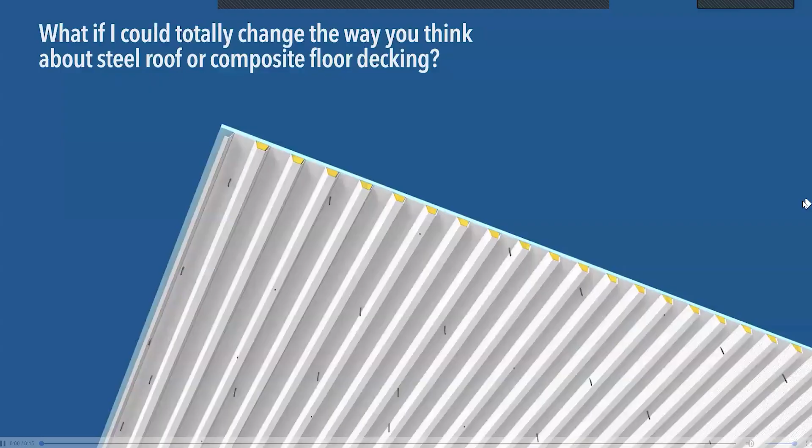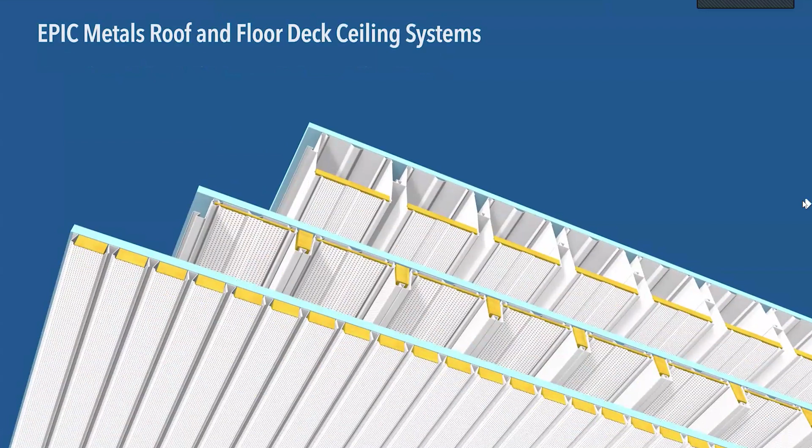What if I could totally change the way you think about steel roof and composite floor decking? Look at all those screw shanks that stick through the metal deck. You will never see that with any of our deck products because all of the screw shanks are hidden within the components of the deck. And that's very important to know and understand because seeing screw shanks in a building just is not a good look.

We have been very committed to sustainability as a company. I could actually give an hour-long presentation on just sustainability of our products because our president and owner of the company, he's over the top committed. We've done 388 LEED certified projects in 42 states.

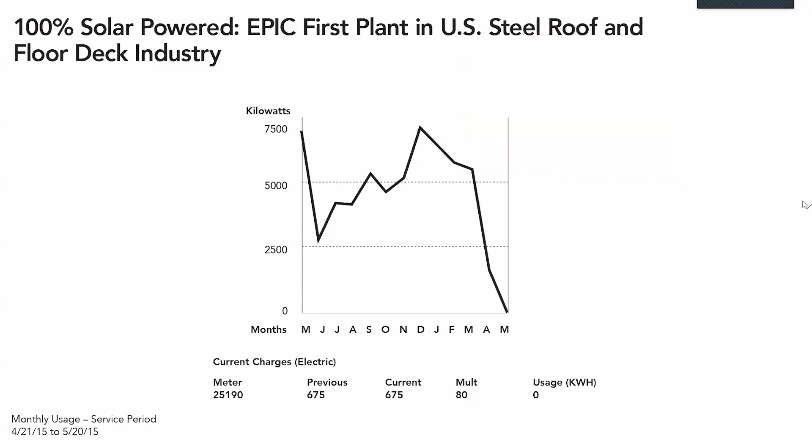As you know, when you get on a plane, for example, Southwest, they always say when you land, we know you have many choices when it comes to airlines. We know you all have many choices when it comes to picking a structural deck or an acoustical metal deck system. But keep in the back of your head that we're the only deck manufacturer that can make this claim.

Currently, we can give a design team an environmental product declaration. But just be aware that EPD basically says that the metal deck is 100% recyclable at the end of a building's life. That doesn't mean the material comes from 100% recycled steel, but steel is recyclable. We can do very high levels of recycled content in steel, and to be honest, it adds no cost to the material. But an EPD is not product specific; it's metal deck specific.

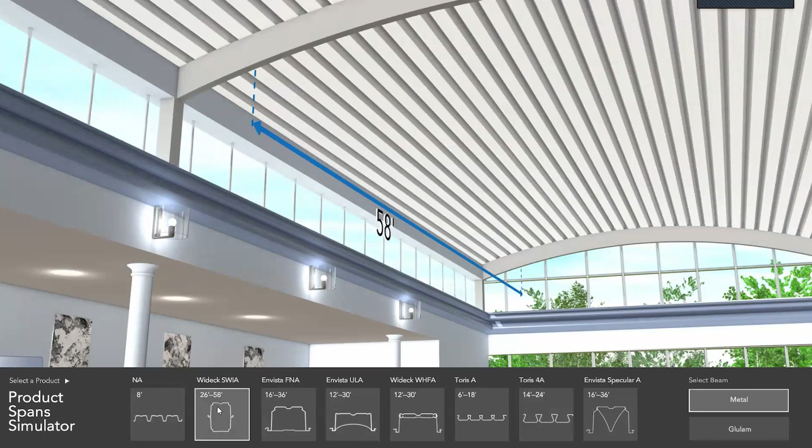I will guarantee you with this example, the deck that I showed you originally is only 1.5 inches deep, whereas this product is 2.5 inches deeper, or 4 inches deep. That being said, even though you're adding 2.5 inches of thickness to the roof, you would be saving by eliminating steel in comparison to this example. Now, a contractor will try and say, wow, this other deck is way more expensive. Well, you have to compare how much steel you got rid of.

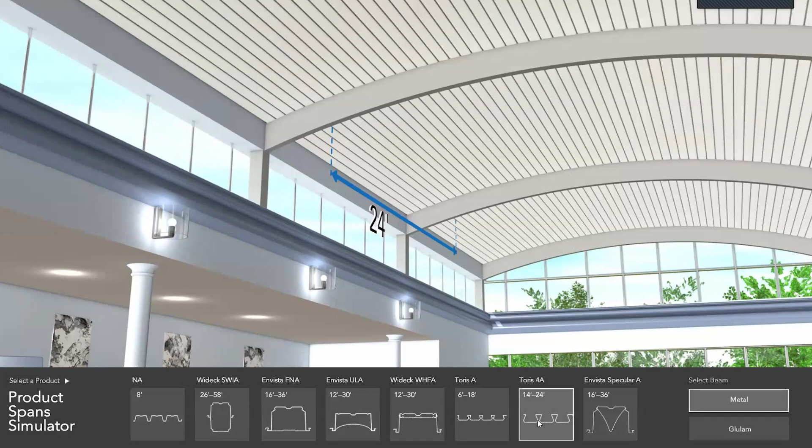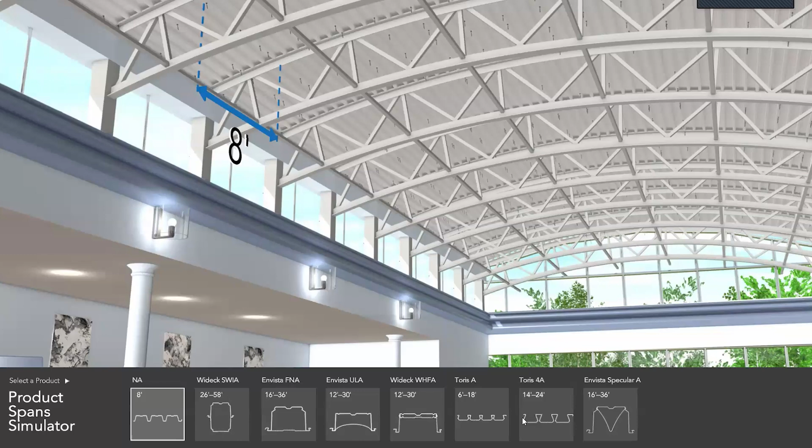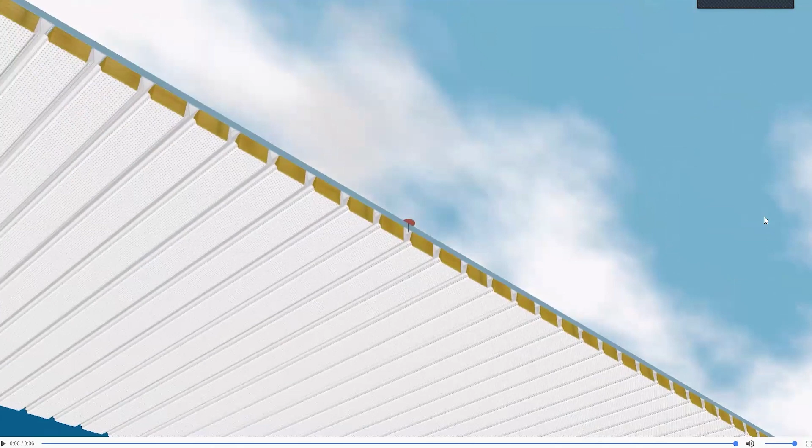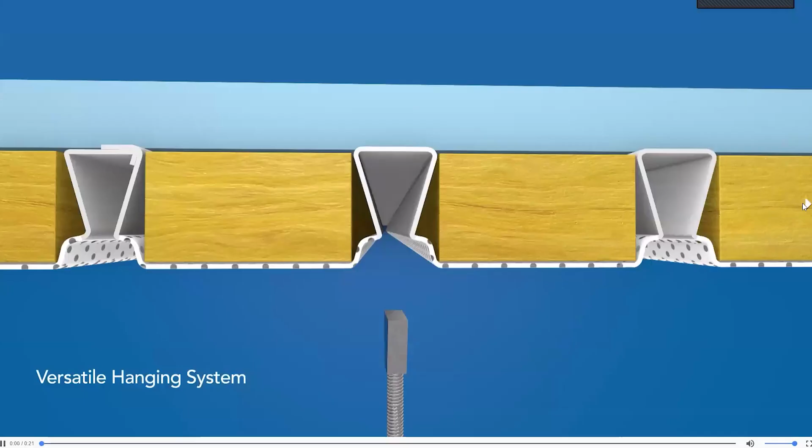And also, we're not only the structural deck, but we're the finished ceiling. So the battle we have to fight all the time is when a contractor says let's compare pricing, you have to get them to put a hung ceiling below this, because that is an exposed metal deck. It's not a ceiling system, whereas this is the structural deck and a finished ceiling system. As I said in the beginning, all the fasteners used to attach the rigid insulation, all those screws get put down through the dovetail slot of our deck. This dovetail deck is very linear looking. We have other products that look more like a plated ceiling. We also have a hanging system that's very important about our system.

So now you have a structural deck that has an evaluation report. It can be used as the finished ceiling as well. It's exposed, and we can hang things from it without having to do all these other ancillary supports. Now, in a roof deck application, this product will support anywhere between 60 and 110 pounds. It depends on the gauge of the deck as to how much that hanger will support.

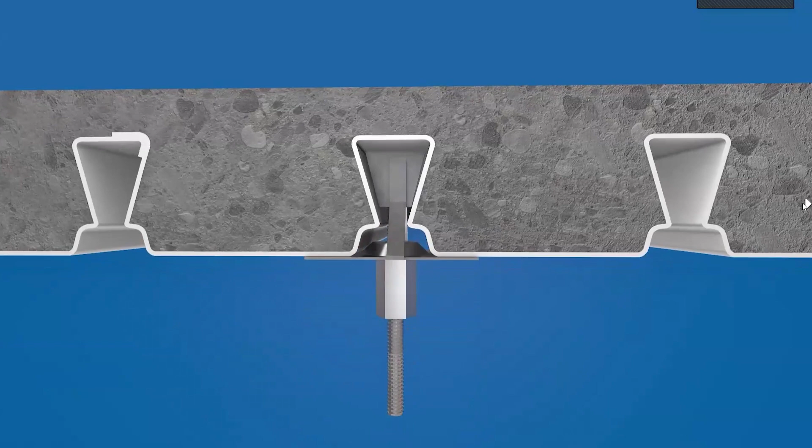Now, one of the companies I used to work for many years ago was Unistrut Construction. You guys have all probably heard of Unistrut. I have all their part numbers stuck in my head. I don't know why. It's probably because I remember all their systems.

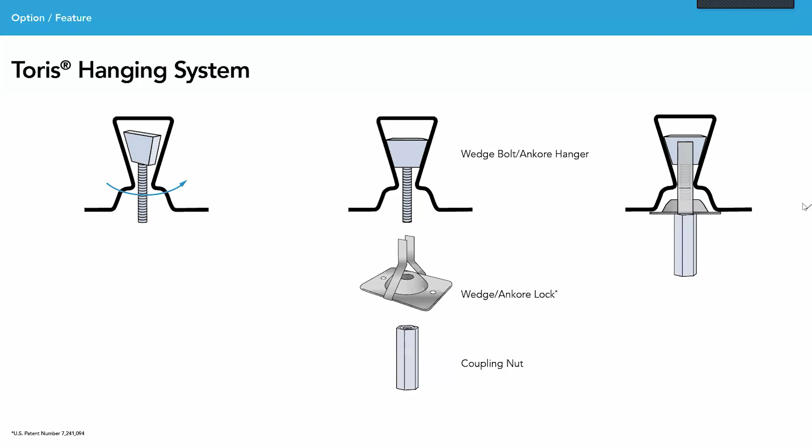When I used to work for Unistrut, the rule of thumb was 20 to 30 minutes for every Hilti anchor that went into a building. Here in California, union carpenter rates are over $100 an hour, so one bolt that takes 20 to 30 minutes is $50 a bolt. Let's say you were doing a big hospital or a big data center job with, I don't know, 15,000 anchors. 15,000 times 50 is $750,000 for an anchoring system in composite floor deck, whereas ours go up in 2 to 3 minutes. So a huge labor savings in using our hangers. This is what the hanging system looks like. It comes with a wedge bolt, a lock, and a coupling nut that's used below.

Now, one of the important parts of our deck is the acoustical component of our systems. And this building in Milwaukee is where the Milwaukee Brewers play.

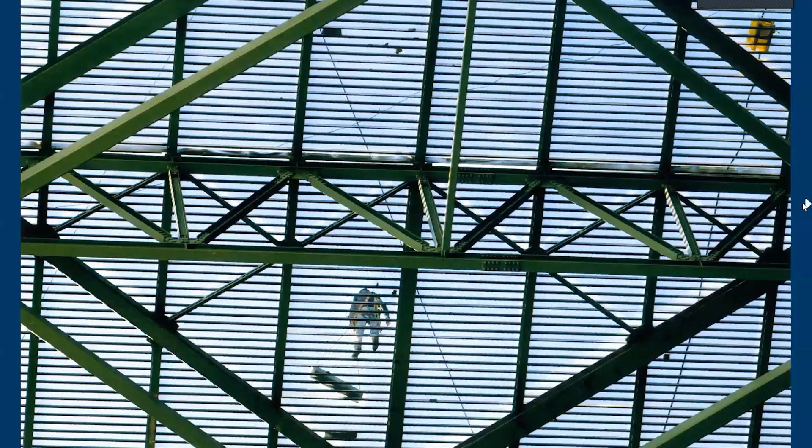And the important part of this slide is basically this next one here. If you can see my sample I'm holding up, what you're looking at is you're looking up through all of those perforations that I'm showing you. And you can see how much blue sky you can see.

There's something in the acoustical world called the transparency index. Transparent means if you can see through something, the sound will be absorbed by it. These products have a very high level of acoustical properties, and that's why you can see blue sky when they took this picture during construction. Picture was taken before our mesh spacer and our acoustical insulation was installed.

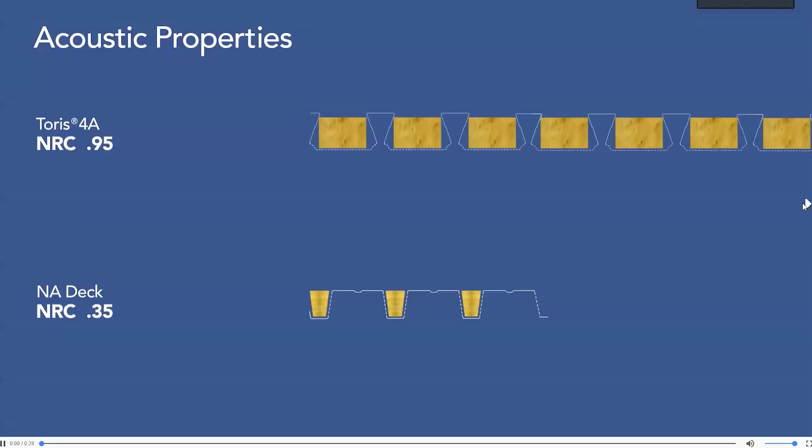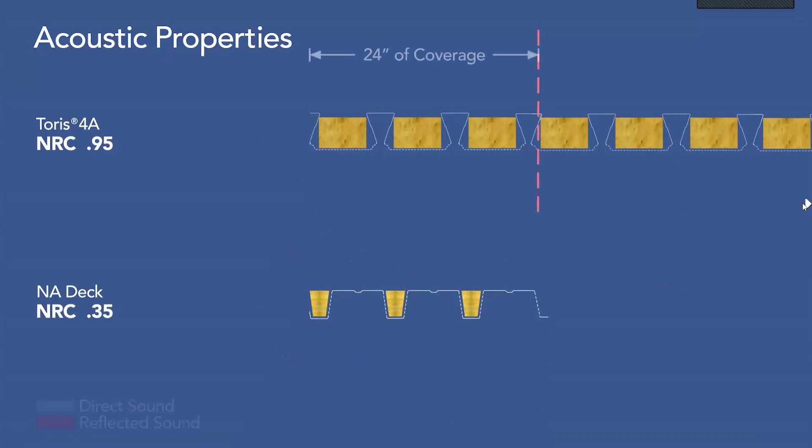Now, I get asked all the time, how do we compare in price? Well, I'm going to show you with this slide. Look at the reflected sound. NA deck has an NRC of 0.35, noise reduction coefficient. Our product has a noise reduction coefficient of 0.95. So there's almost 2.5 times the amount of perforations in our deck than in NA deck, and almost 2.5 times the amount of insulation in our deck as well.

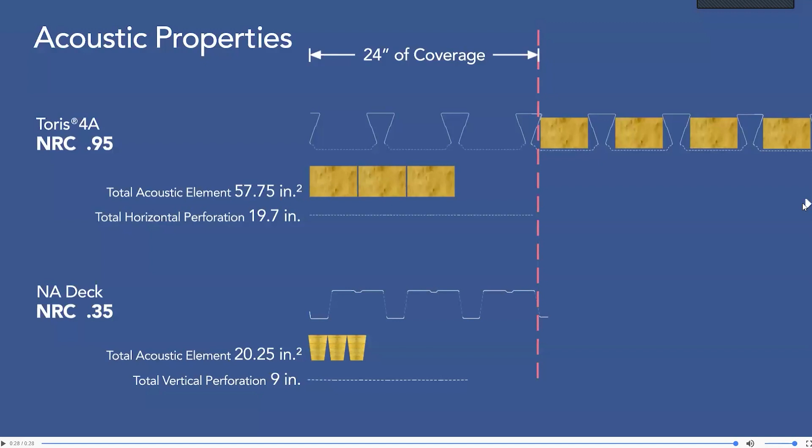So that's why I can't compare in price. But again, if you hang a ceiling below this NA deck, that assembly is now more expensive than our dovetail deck system. We also have the ability to hide utilities. So either sprinkler lines, power, data, etc. They can all be done with the use of access panels, cover plates, etc.

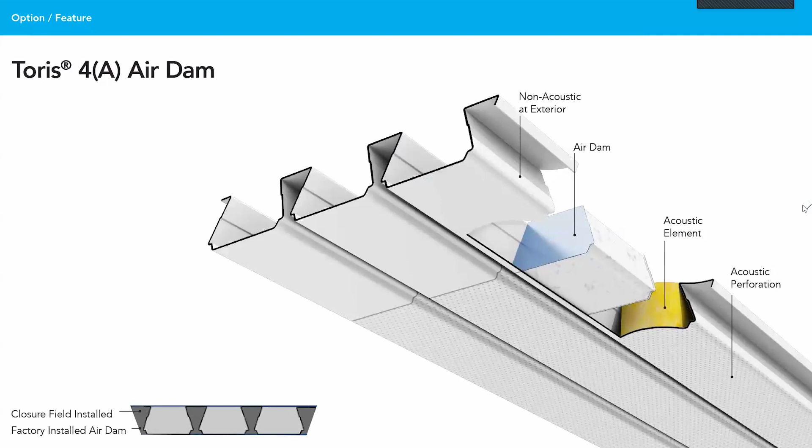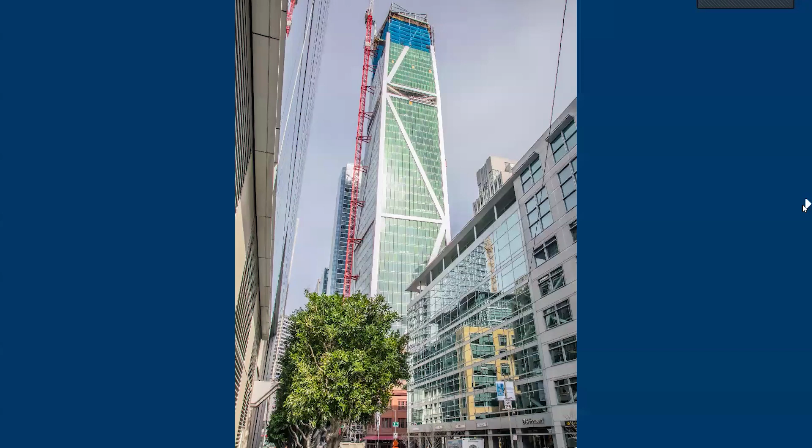Here's an example of a building in downtown San Francisco that won the American Institute of Steel Construction Award, 181 Fremont. One of the reasons we got this job, I think our deck was used in 14 or 17 floors of this building, was because of the information I just shared with you about our hanging system. The speed at which the subs could hang to our deck made a huge difference on the cost of the job. It was on the cover of Modern Steel Construction magazine. Here's a during construction shot.

So the types of buildings we do are quite varied. It's everything from schools, churches, airports, corporate office buildings, stadiums, arenas, multi-story residential, albeit that's not a big niche, but I could open up a building code and say, yeah, we've done all of those building types. We don't do a lot of strip commercial. We don't do a lot of hospitals, with the exception of we've done a ton of canopies out in front of ER departments and things like that.

Football stadium we did in Waco for the Baylor Bears. This was a genius design, and the genius part of it was done by the structural engineer. The structural engineer used one of our products, like what I'm holding up, but it had no perforations in it. So what they did is they sloped our deck from inner ring to outer ring just enough to allow for the rain and hail of Waco to hit our deck. And our deck now became the gutter system for the entire roof.

They put nothing on top of this deck, so it was all left exposed. And here's where you can see the slope. And the other thing is there were internal gutters and downspouts all throughout the building. So it was a genius application. Excuse me, this is another stadium we did in Louisville, Kentucky.

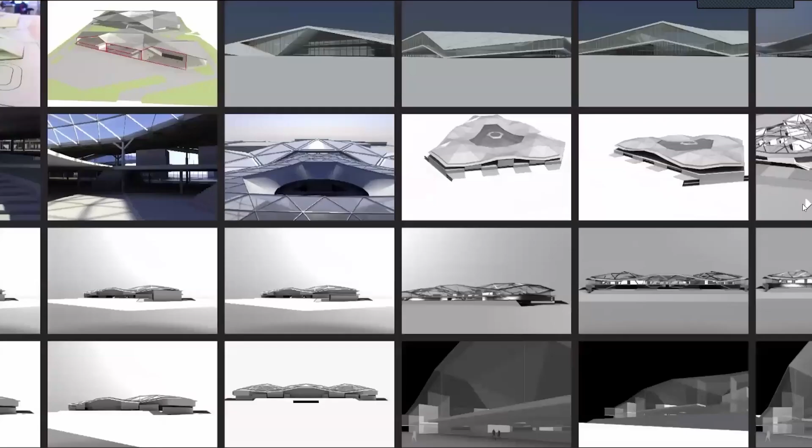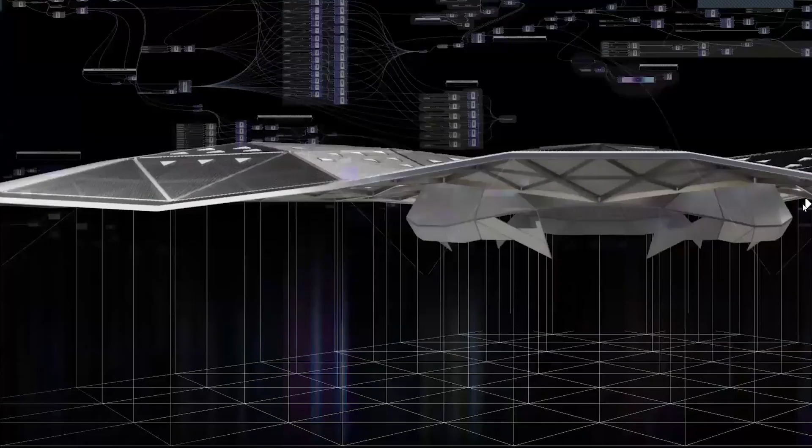Basically, we worked on the NVIDIA job in Santa Clara. And the interesting part about this job was the fact that the building was designed around structural supports that were all equilateral triangles. And you can see the triangles here. They were 72 by 72. And each triangle was made up of, I think, 18-foot triangles that were made into one large one.

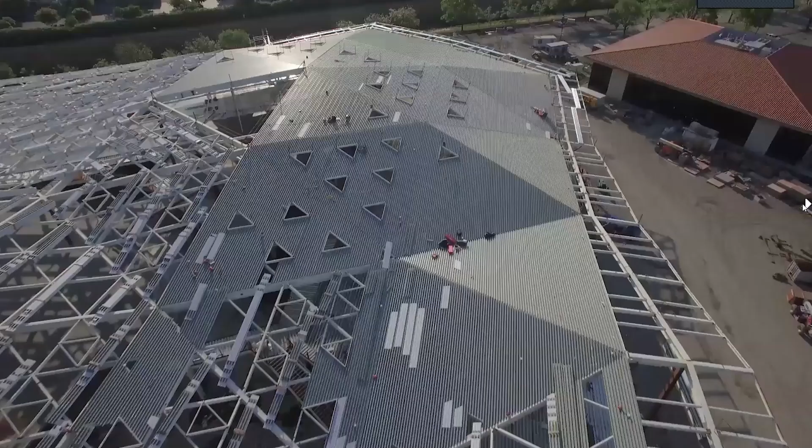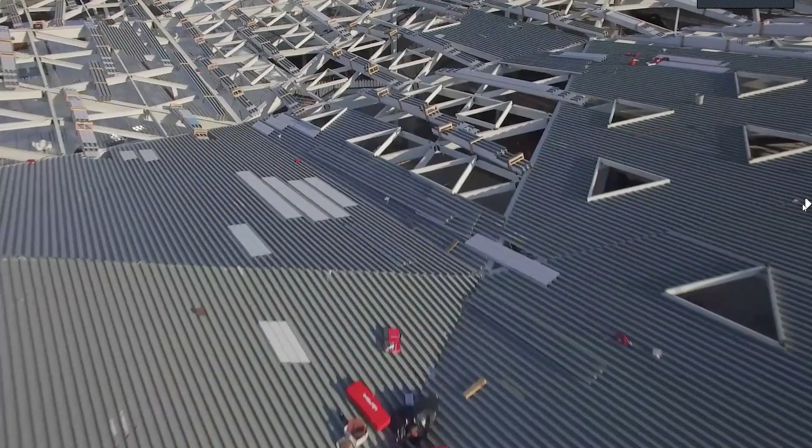And the interesting part about it is the whole company, their products, if you know anything about them, they make video cards that are used in the 3D and modeling and gaming industry. And their video cards are based on the equilateral triangle. So the fact that they took that and made it as part of the design, as an architect, that's just fantastic to me.

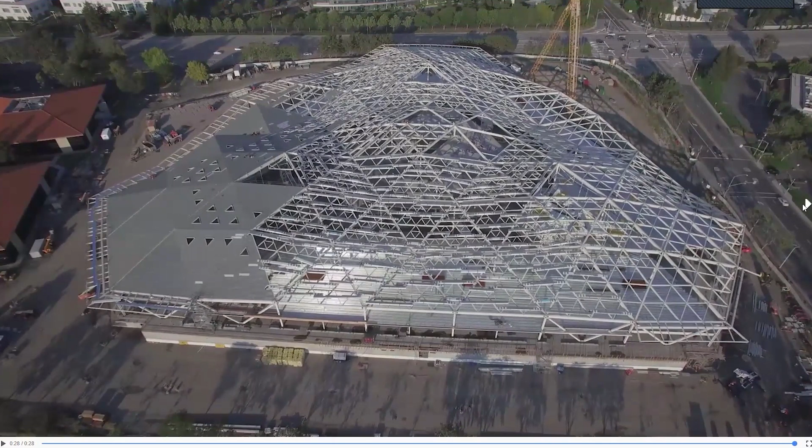You'll also notice all the bundles of steel up on the deck or up on the roof. And what we did to help save money was we bundled all the different lengths in one bundle of steel instead of shipping all the same sheet lengths together and letting the installer figure it out. We did it on our own to help save money.

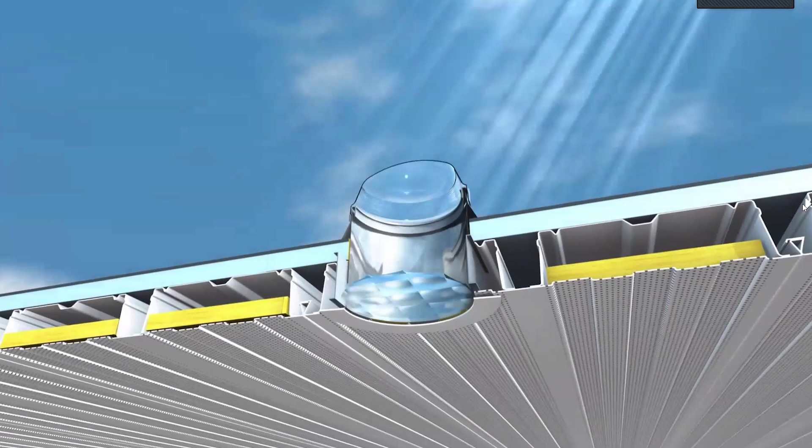So here's the inside of the space. We did 2 buildings for them, and I believe there's going to be a third coming up, a third phase. Again, talking about daylighting credits. If you're trying to get extra daylighting credits in a building by using like a Solatube type system, we can do cutouts in the deck so those holes are already done when our deck ships.

Here's a project we did up near Napa at American Canyon High School. Those were all 14-inch Solatubes. Up in the Bay Area, I think the state USGBC just had their meeting up in this building. All of our deck was inside this building, and it won an AIA Education Facility Award. That's our composite acoustical floor deck.

We've done a lot of natatoriums across the country, and this is at San Francisco State. And in those spaces, there's a lot of corrosive chemicals. Air changes need to be set so that there's enough airflow in the space. But you also have to resist all those chemicals with a paint system.

So we use what we trademark and call a Natacoat system, but for all intents and purposes, it's a Tnemec paint. And the Tnemec paint is applied at the factory, and then a field coat is required after the deck is installed. And all the insulation is encapsulated so it is protected in the wet environment.

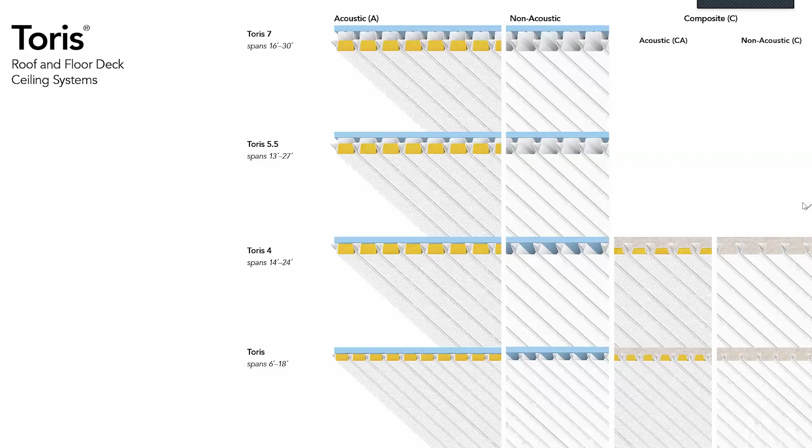We have a product called Toris. They're all half an inch deeper than our standard deck profiles, which you guys may or may not have heard of already, ER2RA, ER3.5. What we did is we wanted to value engineer our own deck systems by increasing the deck depth by half an inch. In doing so, that means I can use a lighter gauge and meet the same spans and carry the same loads and have it be less expensive. That could be done on any of these Toris profiles.

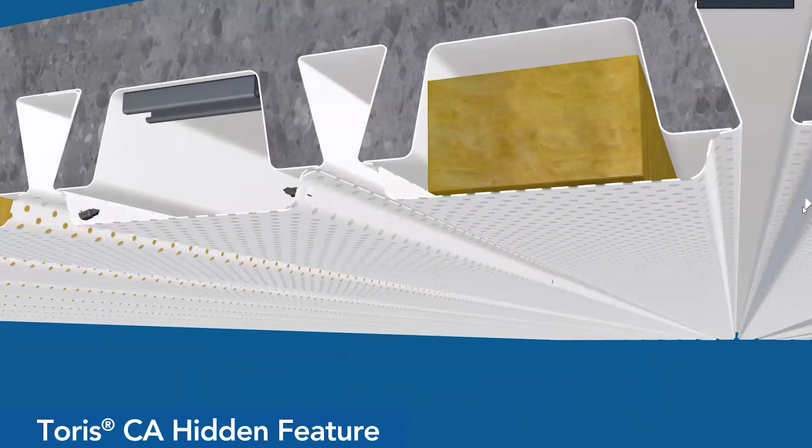We also can hide the utilities in composite deck applications. And here's how to do it correctly. So we can do removable access panels wherever the utilities are going to be hidden. Now, in a 4-inch deep profile, it's much easier to do that, but we put a piece of Unistrut up inside the hat channel of the deck.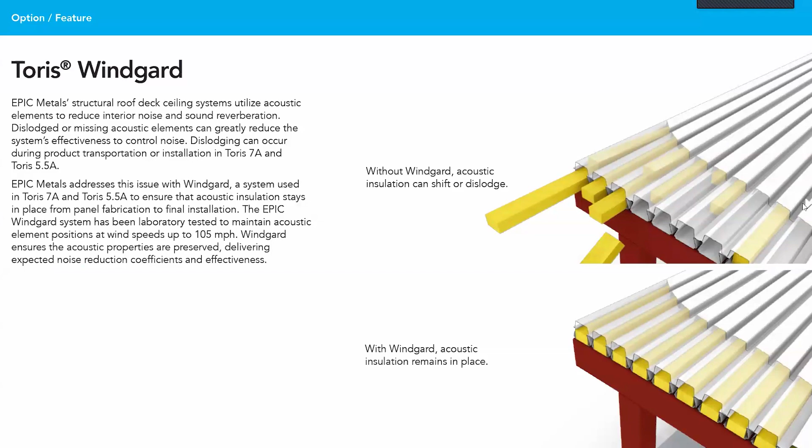We also have a Windgard system in our cellular profile, which means this insulation is installed in place and it's actually tack welded on the inside at the ends so that it doesn't fall out during transportation. Project we did up near kind of Fresno, Bakersfield area, Stockton, Terra Bella. Recreation center we did in Utah.

Now we have different ways to do paint systems. The cheapest thing to do, most people think, which is not the case, is to have us just ship bare galvanized deck. The second choice is to have us provide a 2-coat epoxy polyester primer on both sides of the sheet. We do that for anywhere around, depending on the deck profile, about $1.50 a square foot. I will bet all of you that you can't provide a painting contractor that's going to get up and chemically clean the steel and paint it for less than what we do it for.

Subcontractors think they want to save as much money as they can, and so they give us orders for bare galvanized, but that ends up adding money to the job because the painting contractor now has to clean everything. This is a recreation and aquatic center up in San Bruno. I actually just got these photos of this job about a month ago. So you can also see how our hanging system was used a lot. Here's Temecula Valley High School out in Winchester, California.

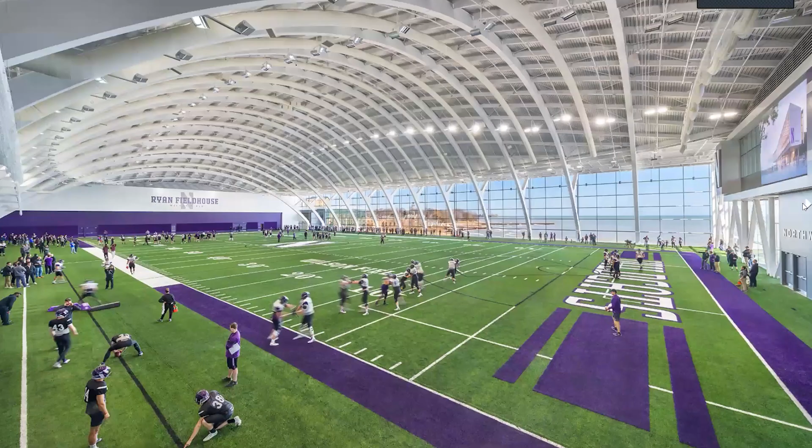Northwestern's Ryan Fieldhouse, where our products were used. This is where all the athletic teams, most of them, lacrosse, football, soccer, all practice. Library we did at Central Arizona College. And again, what you're seeing is all of our deck being exposed.

Here's a golf course that we did in Hawaii. And this job was actually prime painted by us and then painted in the field after the deck was installed. A lot of times we get questions about painting it in the field. It's not a big deal as long as the painting contractor is using a spray application and not getting up there with a roller. It's very easy to do.

Here's an example of a building in Colorado. So our deck was married with glulam beams. Convention center we did out near Denver International Airport. Nike World Headquarters in Beaverton, Oregon, our deck was used as wall panels. We've actually done some jobs for Apple out in the Reno area, east of Reno, where our deck was used as a sunscreen, but with no perforations.

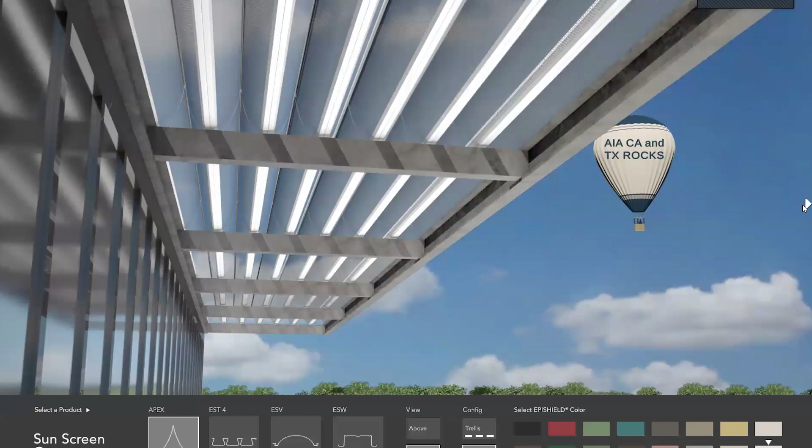Make sure you look at what the hot air balloon says. AIA, California, and Texas rocks. I did a presentation one time where I normally have the firm name that I'm presenting to, and I accidentally didn't change it. So when I presented to the firm the next day, who was the competitor of the firm the day before, I got a lot of boos from about 35 people.

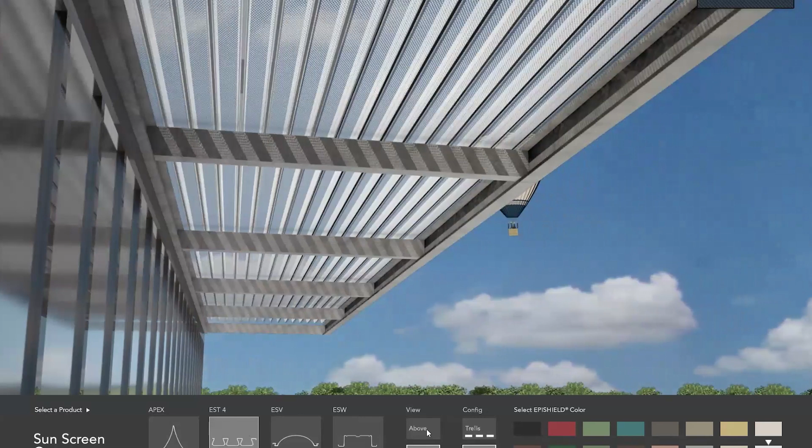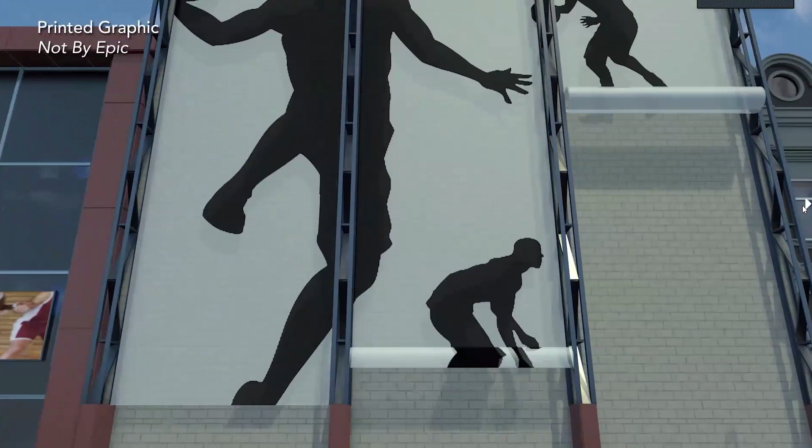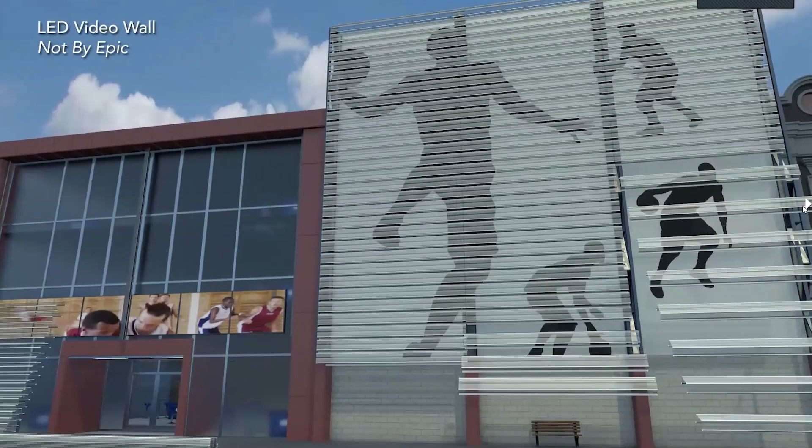But our deck can be used in a sunscreen application, either in a vertical application or a horizontal application. We can put different paint finishes on it. We even ship out screws that match the color of the paint. I'm going to skip this slide real quick. This is just showing you how creative you guys can get, which we know you all are, on using a system that you may not have thought about using our products for. This is at, let's call it a college, with all the basketball and athletes' images put on the outside.

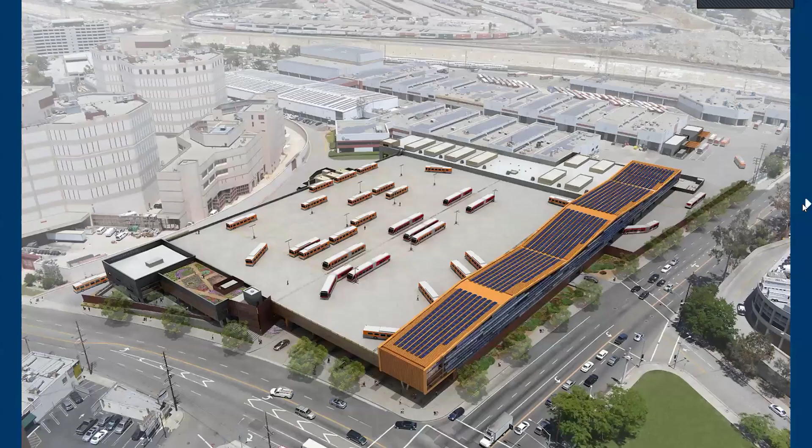This is a building that we did in downtown LA. So if any of you are in LA, you may have seen this building. This is the Metro Bus Maintenance Facility. Everything you see that's orange is actually our deck.

And the architects, when they first met with me, I hear all the time, well, we're going to use you on a specific job in ABC City, California, right? But when the architects met with me, they actually knew, because I practiced architecture for 15 years, of which a good portion of that was in Colorado. And a Colorado firm designed this out of their LA office.

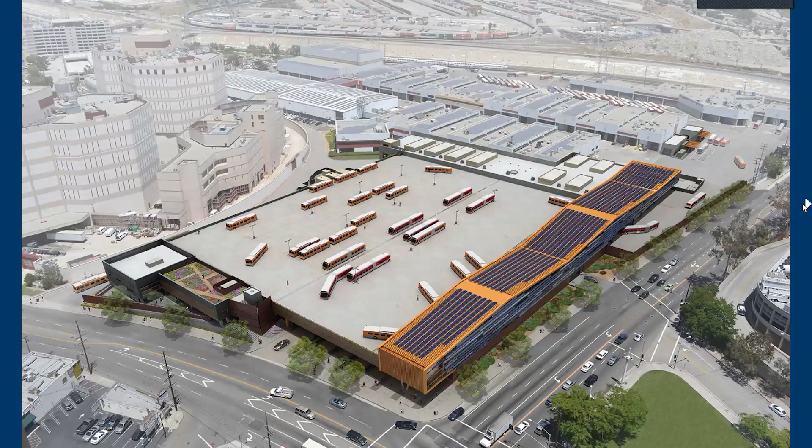And they knew I was an ex-employee, and they basically said, your deck is the most important part of this building. I never get to hear that. And the fact they shared that with me was pretty awesome. And the reason this is an open air structure was so that they could, from what I was told, not hide, but expose artwork that would rotate in the corner of where this intersection is.

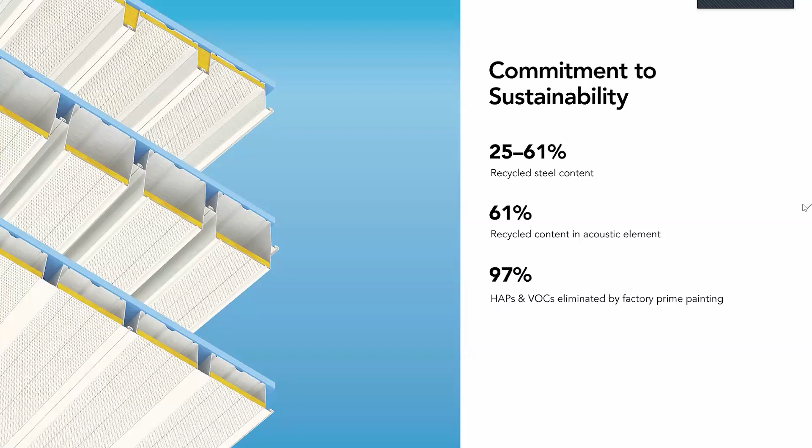Now we also make a series of wide deck profiles that'll span anywhere from 24 feet all the way up to 58 feet. I'm not going to go into each one today, but know that we have the ability to do very long spans. Also, our commitment to sustainability is important, with the recycled steel we can do. We can also use recycled acoustical elements. And by having us prime paint the deck, or finish paint, we can help eliminate HAPs and VOCs.

It's also important to know that in classrooms, kids are missing one out of every four words. Whenever our deck can be used in a classroom environment where they will be able to hear every word because of good acoustics, it makes the learning environment better. This is our Super Wideck with a cable suspended access panel. We also have to put air dams and foam closures like I explained earlier.

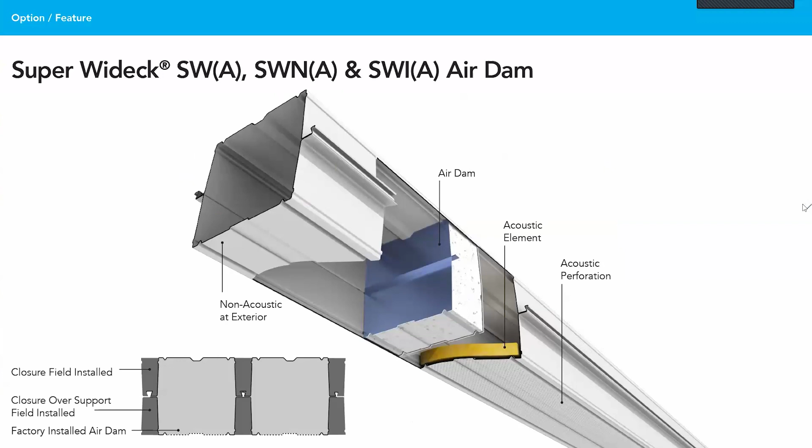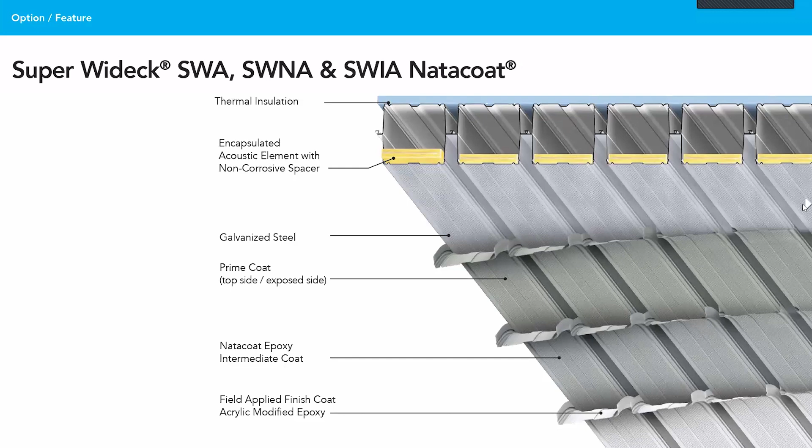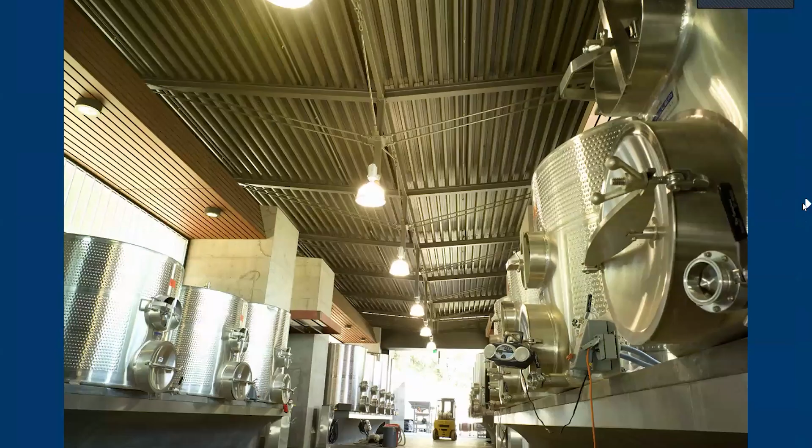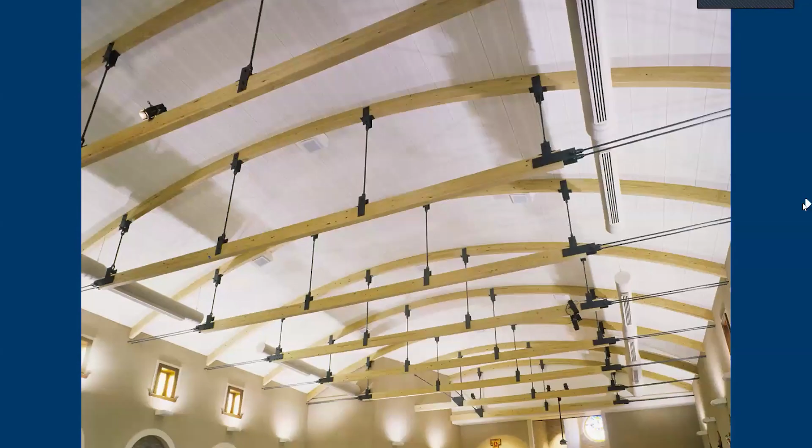This is actually a beautiful building in Pennsylvania that's actually a church. One of the reasons I love working for the company and presenting to firms and individuals like all of you today is the sooner we can help you make a product decision that hopefully fits with your spans, your cost, your acoustics, all of that, the sooner that spaces like this get to happen. Now, I know you didn't look at the deck when you saw this picture, but God bless you if you did.

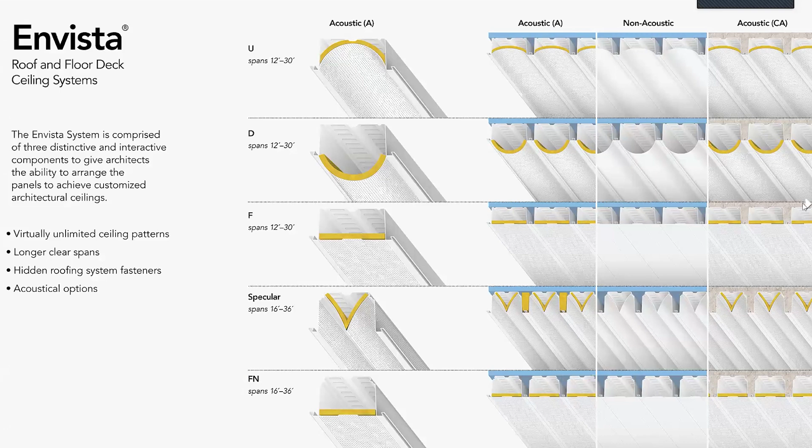I want to get to the part that is our Envista profile. That's this profile right here that I'm holding up a sample of. Hopefully you can see it well. We make a product that's called Envista. It has an evaluation report. We can do concave, convex panels. So you can really draw the building user's eyes upward to see something different than what they're normally used to seeing. We also have six different wood grain finishes we can do. That's a paint system that's applied.

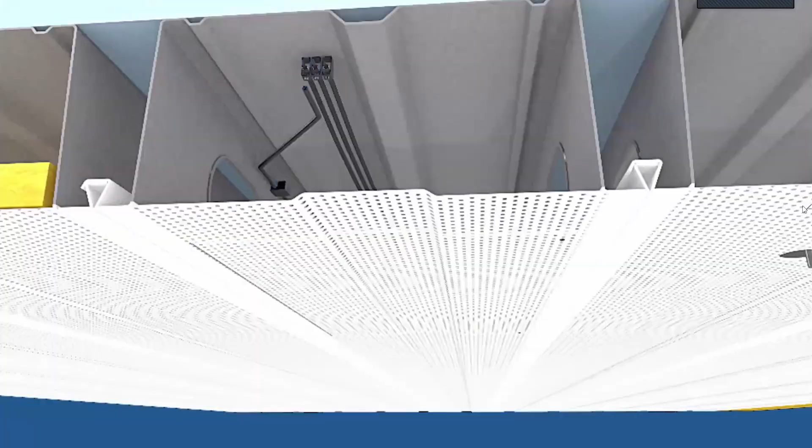One of the most important parts of the materials is this right here. Here's how to do it correctly. We can do a hinged access panel, and we put in oval-shaped companion holes, they're called. That way you can actually run the utilities inside the depth of the deck, and we put Unistrut at the end of every access door that allows for the utilities to be hung from the underside, and then the companion holes that we put in allow for the utilities to run perpendicular, one cell to the right, one cell to the left, for the hanging of the light fixture. That's how to do it correctly.

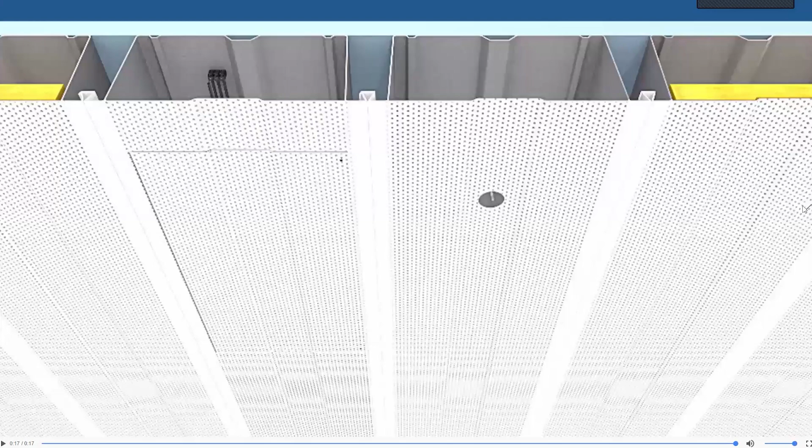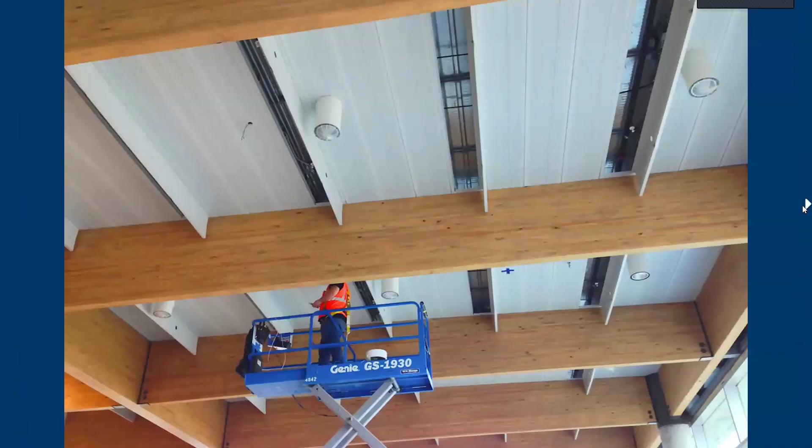Here's an example of where it was done. And again, you from Texas, I don't know if you've all been through this space, but this was at Dallas Love Field. And you can see that Mr. or Mrs. Electrician is up on their Genie lift. And they've already done this row right here with all the utilities. This one and this one haven't been done yet. There's the piece of Unistrut. That way they can install to a piece of channel just like they already know how to do. This is what it looked like after the fact.

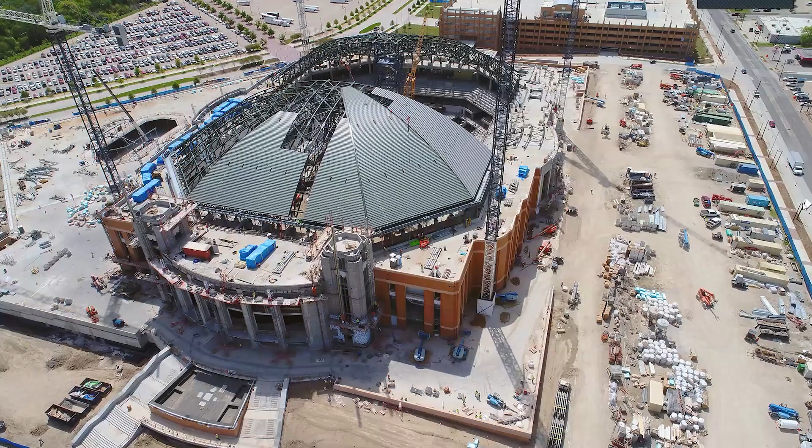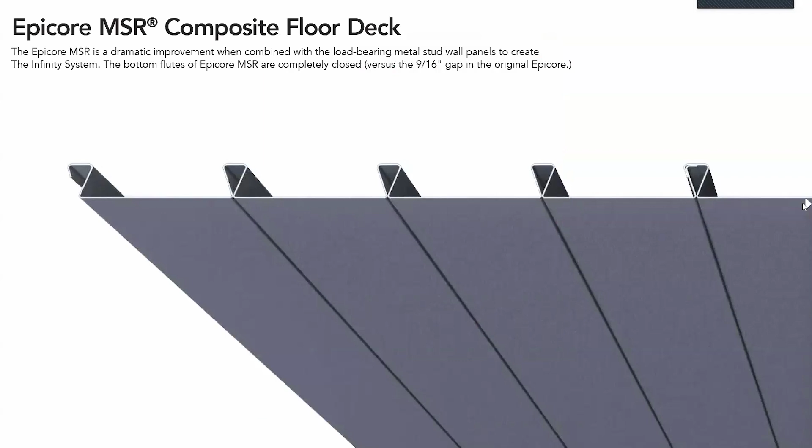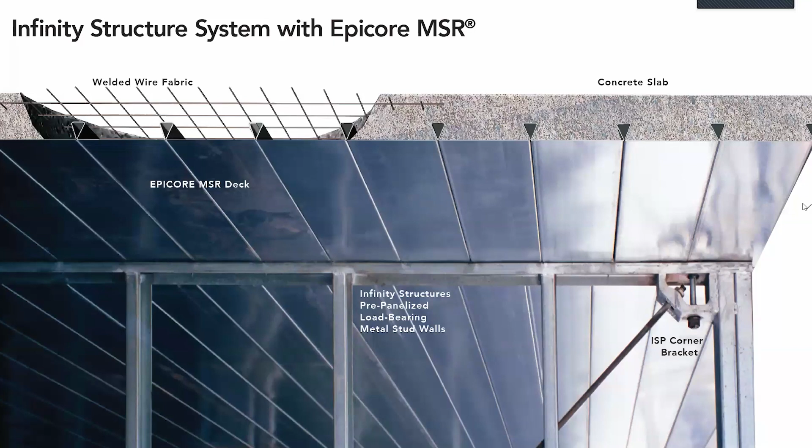We make a product that's used in the multi-story residential market. We call it MSR. I don't know how many of you may or may not be involved in this type of work, but we have a composite floor deck system that's used in those spaces simply because we can help minimize the amount of closures that are used on a job. It's a huge deal. Here's an example of a job we did in Tallahassee, Florida.

So you can either put furring channels and then put drywall underneath it. It's got, I think, an STC rating of 60, which is really high. Obviously, the concrete thickness will be dependent on what the STC rating is, as would what you're installing to the underside. Sometimes they just do a texture finish of the steel and then they paint it. This is a job that was in San Jose. We've worked with a lot of different design firms across the country.

We've been in about 12 to 13 movies, and I'm ashamed to say we were also used in a house on a reality TV show. I sold a job about 8 or 9 years ago. Family was building a new home down in Newport Coast. I thought it was Kobe Bryant's house. It was not. It was for a couple that were on the Real Housewives of Orange County. So I'm ashamed to say, or maybe not, that our deck was used in Dave and Shannon Beador's house. They're no longer married. They divorced, sold the house for $13.75 million, but our deck was used in the house.